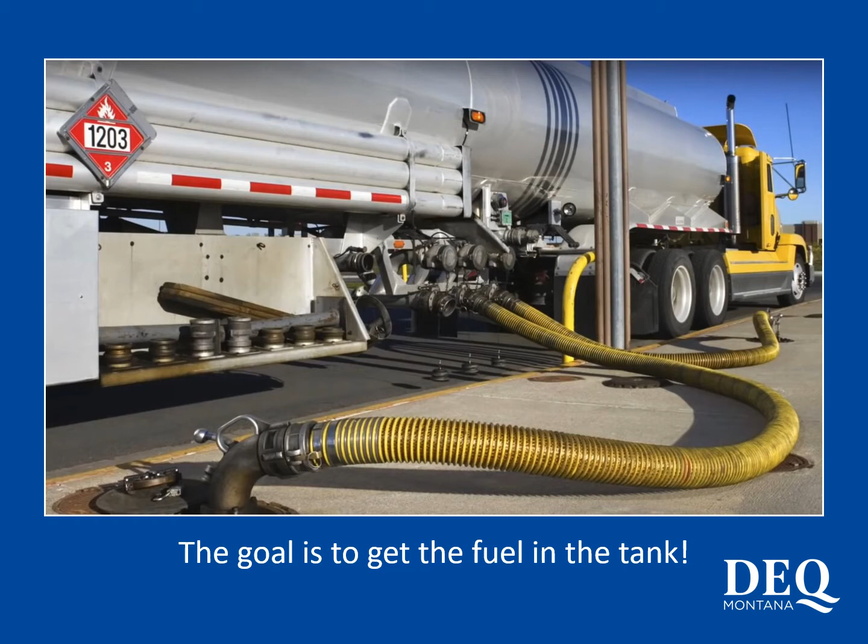Basically, it is our goal that all of the correct fuel be placed in the correct tank, safely.

Always chock your wheels and set the parking brake. Having your truck roll away from you would be quite embarrassing, not to mention it could lead to spilling fuel and even causing a fire.

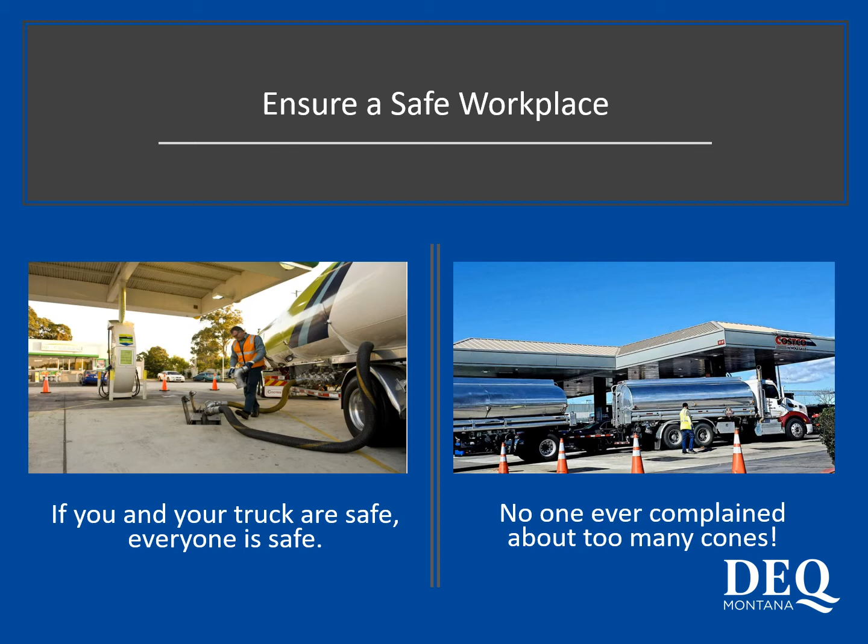Always barricade your fuel delivery area. Cones are your friend. They won't stop a car, but they might give you warning when someone comes too close. Alternatively, if you don't use cones or barricade your work area, anything that happens could be considered your fault.

Check for Montana operating tags. All tanks should have one. If you are delivering to a tank for the first time and it does not have a tag, investigate further. That tank might have been taken out of use since your last delivery.

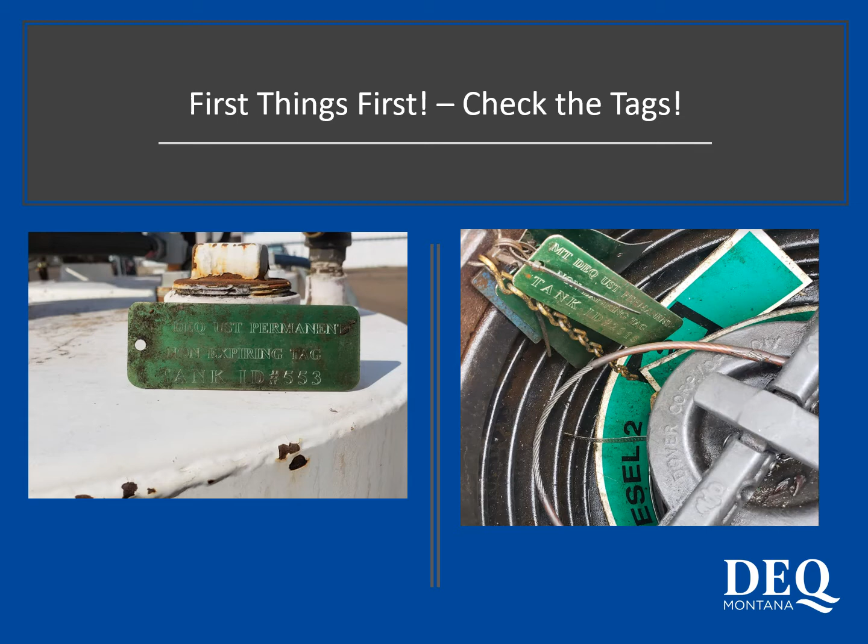Before delivering fuel, check the operating permit for the facility. Make sure the facility has a current operating permit. Look at the operating permit closely and see if there are any tanks with the tank status 'Do not fill.' Be sure you know which tanks you can't fill.

Before delivering fuel, you must check the Do Not Fill list on DEQ's Underground Storage Tank website. The website address is listed on this slide. Any tank on the Do Not Fill list may not have fuel delivered to it.

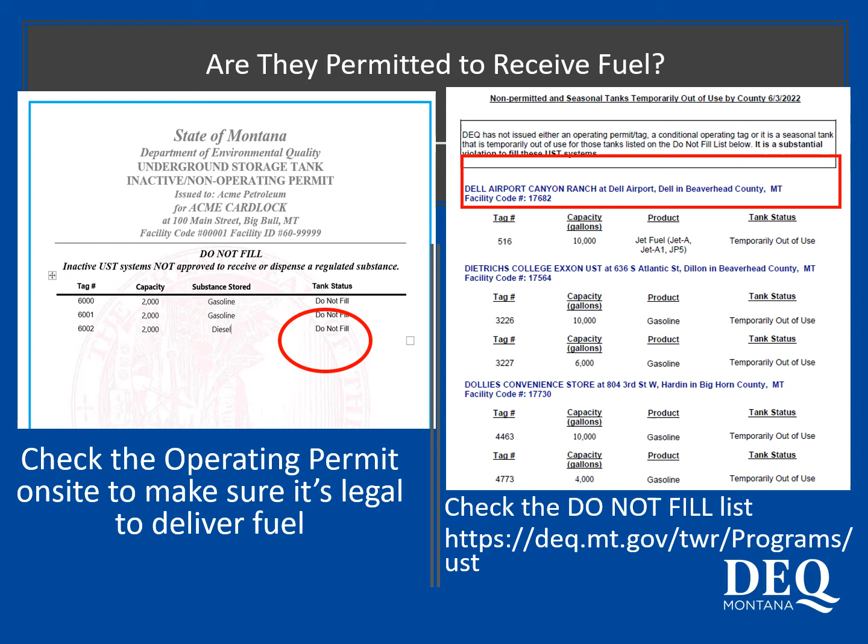If you have any questions, always call someone at the UST program. Delivering fuel to a tank that is not permitted is an expensive mistake and a serious violation. Don't do it.

Always check the product level of the tank before you begin dropping fuel. Since 95% of facilities in Montana have ATGs, print out a current inventory. Sticking the tank and comparing the inches from the stick to the inventory printout can often eliminate a drop into the wrong tank, or the wrong fuel into the right tank.

It also allows you to check to make sure that the tank is empty enough to hold the fuel that you are delivering. Remember, tanks should never be filled all the way full. Use 90% as the maximum level to safely fill a tank.

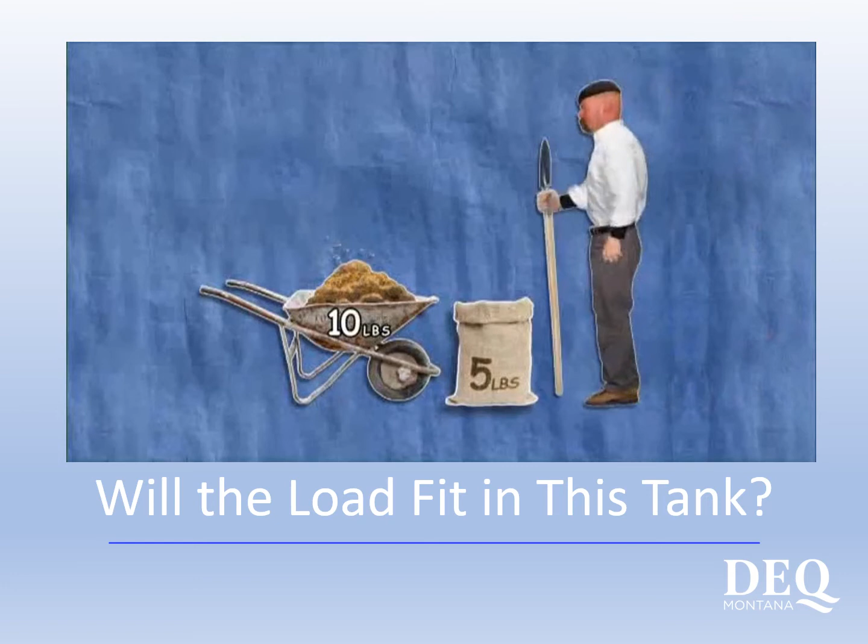We all know about the old cowboy saying about 10 pounds of the horse byproduct. Always make sure you are not dropping too much fuel into the tank. If the amount of fuel dropped plus the amount currently in the tank is over 90% or 95%, you might end up with an overfill situation.

Before you drop your fuel load, make sure you know what overfill protection is at the site. Just because you see a drop tube shut off and an alarm doesn't mean they don't have ball float vent restrictors. If in doubt, look up the facility summary sheet from the UST website or contact the UST program directly.

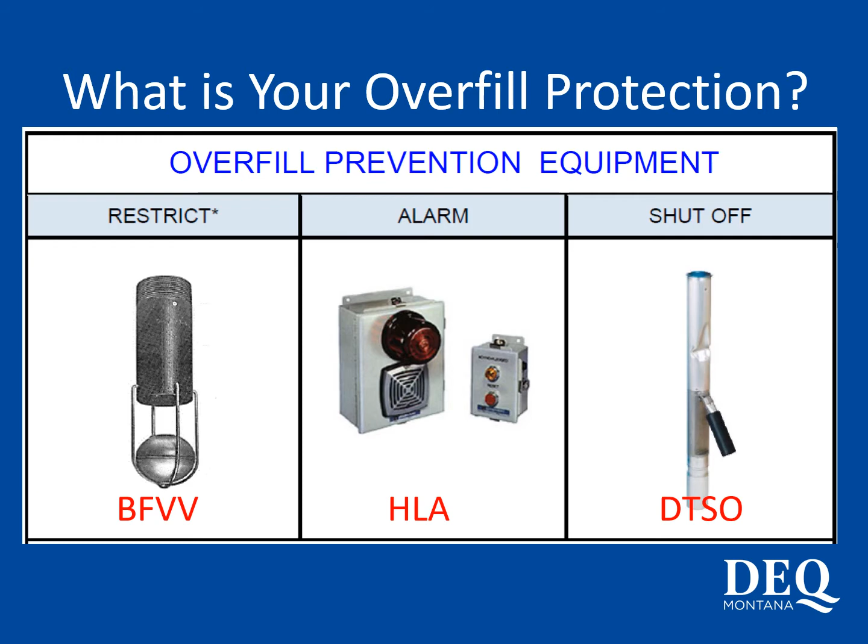High-level alarms are programmed to go off when the product in any tank reaches 90% of its full volume. However, if you are filling 2 or more tanks at a time, the alarm will only go off once. This can hide a second or even third overfill.

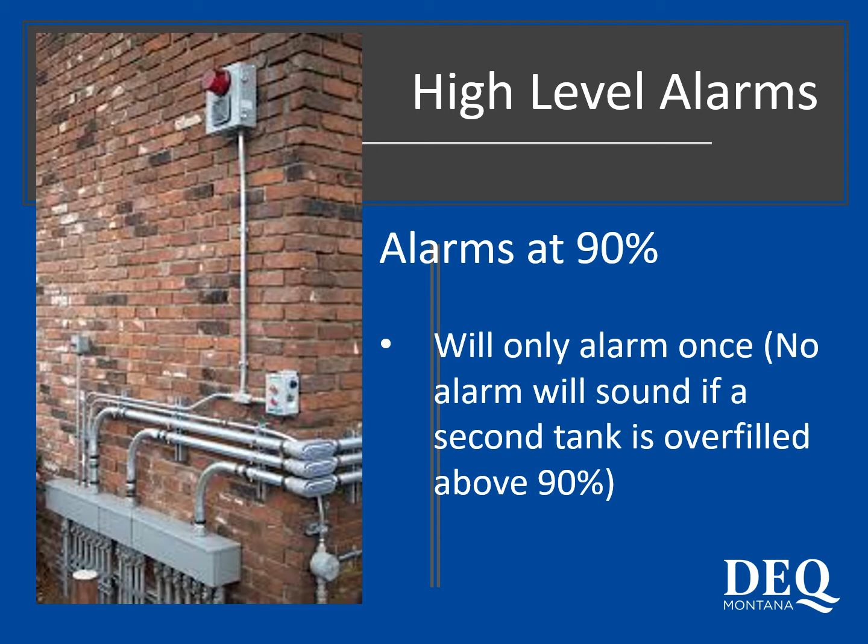Most tanks in Montana use a drop tube shutoff device in the fill riser of an underground tank to make sure that the tank does not get overfilled. These are set to shut off the flow of fuel at 95% of tank capacity.

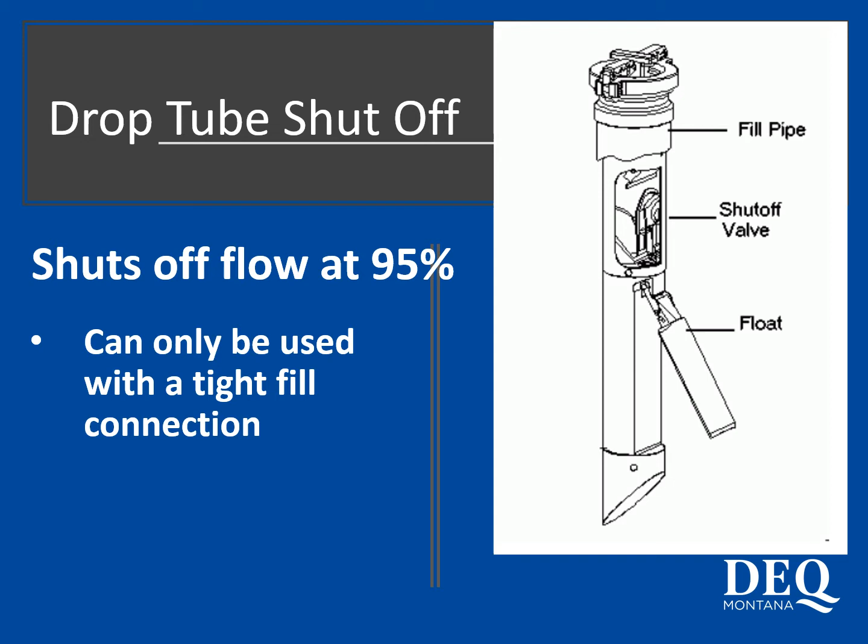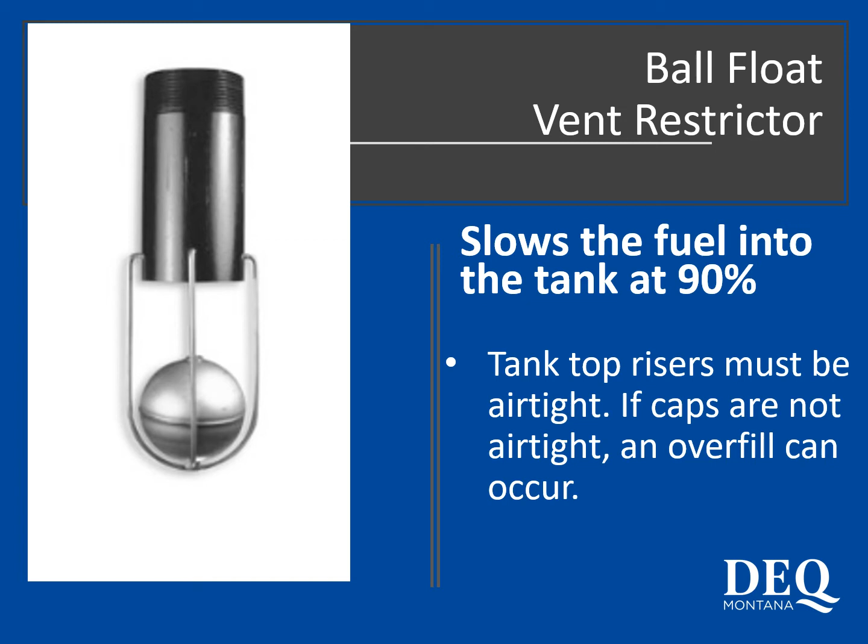The ball float vent restrictor is used to cut off the air going out of the tank through the vent piping. If the air in the tank cannot escape, fuel cannot flow into the tank. However, if the tank top penetrations are not airtight, the vapor and fuel will start coming out of the ATG risers and extra risers once the fuel level rises to 90%.

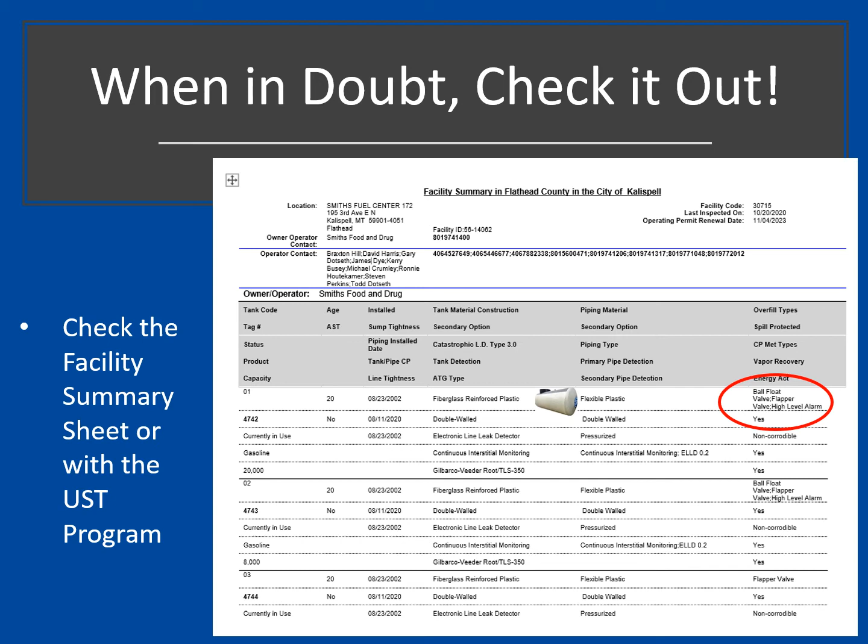Check the facility summary sheets on DEQ UST's website for overfill protection information for all the tanks in Montana. Since sites can have more than one form of overfill protection, it's a good idea to check out the facility summary sheets to see what you are dealing with.

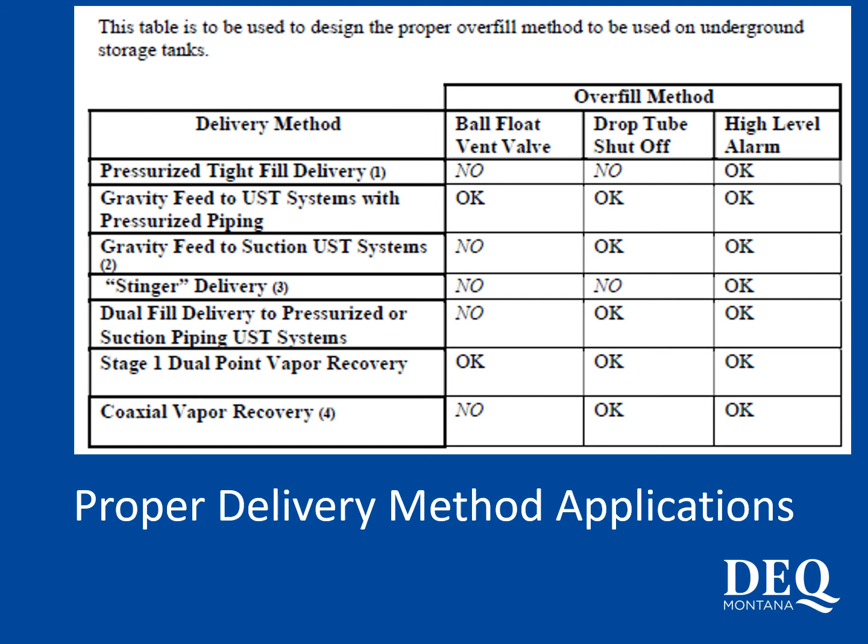Pressurized delivery is never allowed with a tight fill connection in the presence of a ball float vent restrictor or a drop tube shutoff device. When a tank is full and the drop tube valve slams shut, hydraulic line shock can increase the pressure in the delivery hose and cause it to pop off the fill adapter or even burst the hose.

When a tank is full and the ball float restrictor closes the vent piping, the pressure in the tank can quickly pass the 5 psi maximum and blow welds and seams in the tank, causing a catastrophic release. Imagine a full 10,000 gallon tank emptying out of a split seam in just minutes.

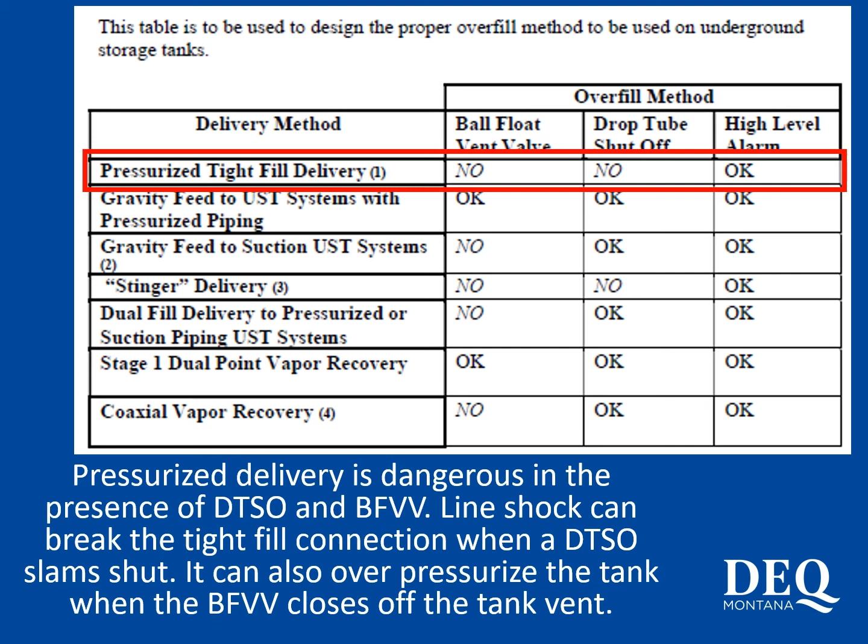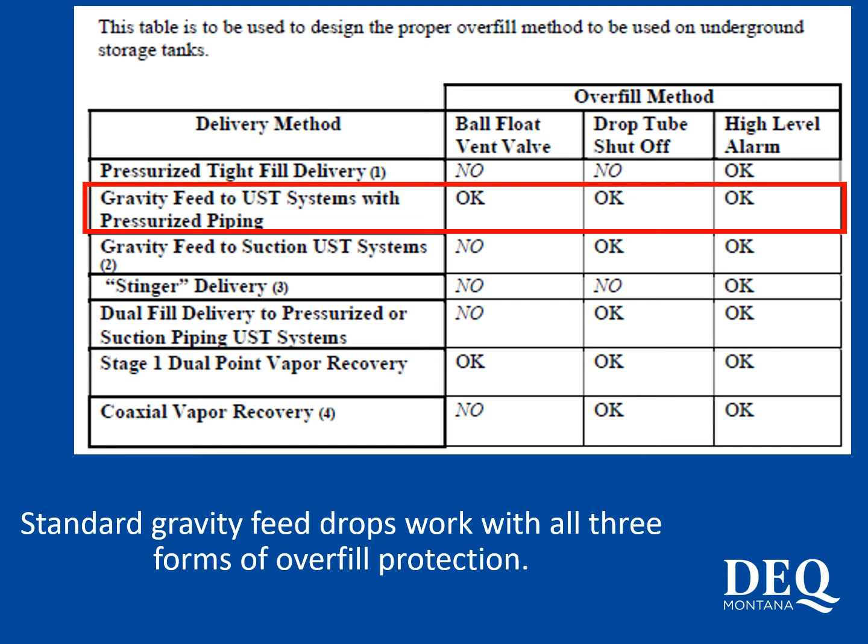Gravity feed delivery consists of a tight fill connection at the fill port, allowing the fuel to enter the tank using gravity to push the fuel from the tanker to the underground tank. All three types of overfill protection are effective with this type of delivery. Always make sure that the fill adapter is tight before connecting the drop elbow.

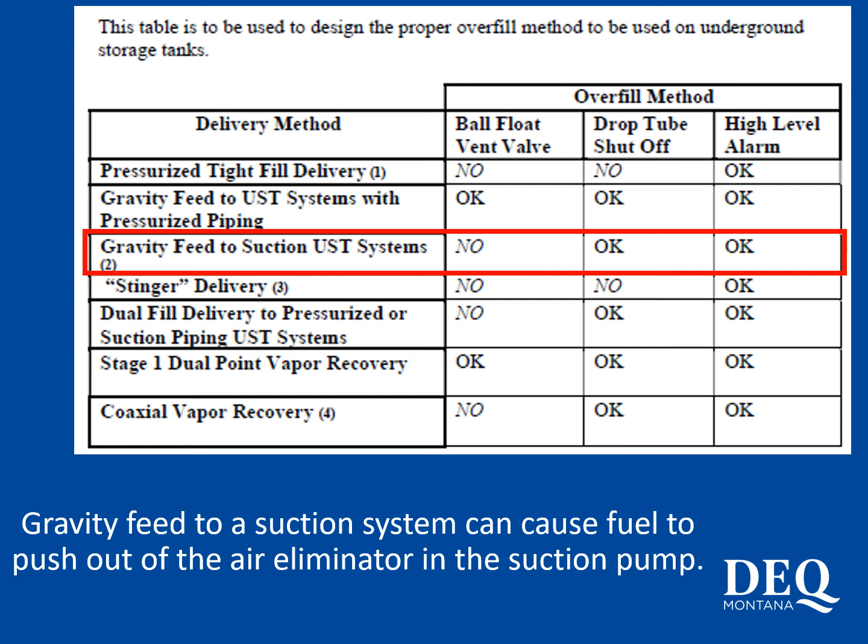Some smaller trucks or wagons sometimes use a pumped delivery using a large gas nozzle to deliver fuel into underground and above ground tanks. This is okay for above ground tanks as they don't typically have drop tube shutoffs or vent restrictors. However, if you use a large nozzle with a 2 through 3 foot nozzle extension on it, it will hold open any drop tube flap or valve and allow the tank to be overfilled. Or, if you have a ball float vent restrictor, you will have fuel spray up out of the fill pipe once the level increases to 90% and closes off the vent.

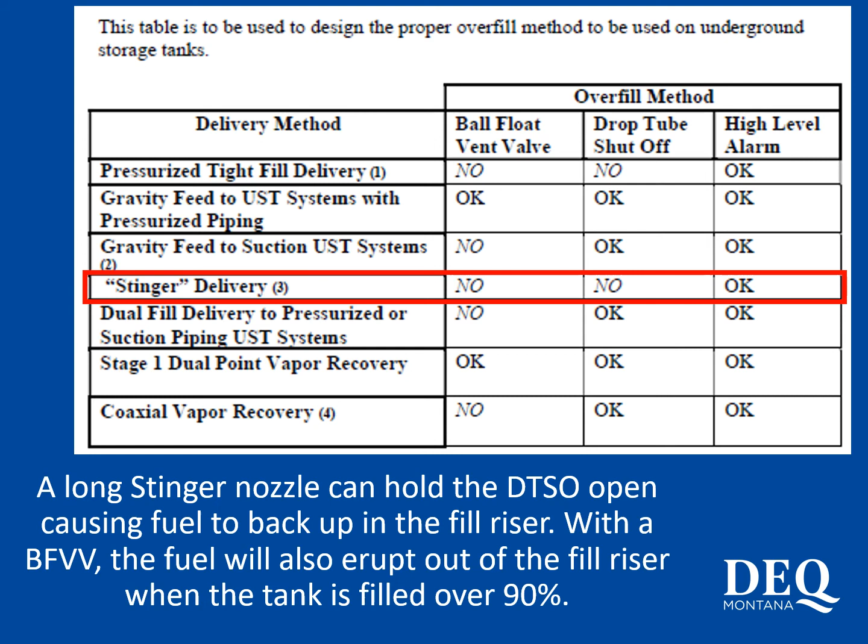During dual hose delivery, you are dropping fuel from different compartments on the transport into the same tank. As the fuel level increases, the ball float vent restrictor will close off the vent, stopping fuel flow into the tank, unless one of the compartments empties before the other. Then the fuel will back up into the hose and truck compartment that was empty, or it will come out of the fill port once the empty hose is disconnected. That is why ball float restrictors are not allowed on tanks with dual fill deliveries.

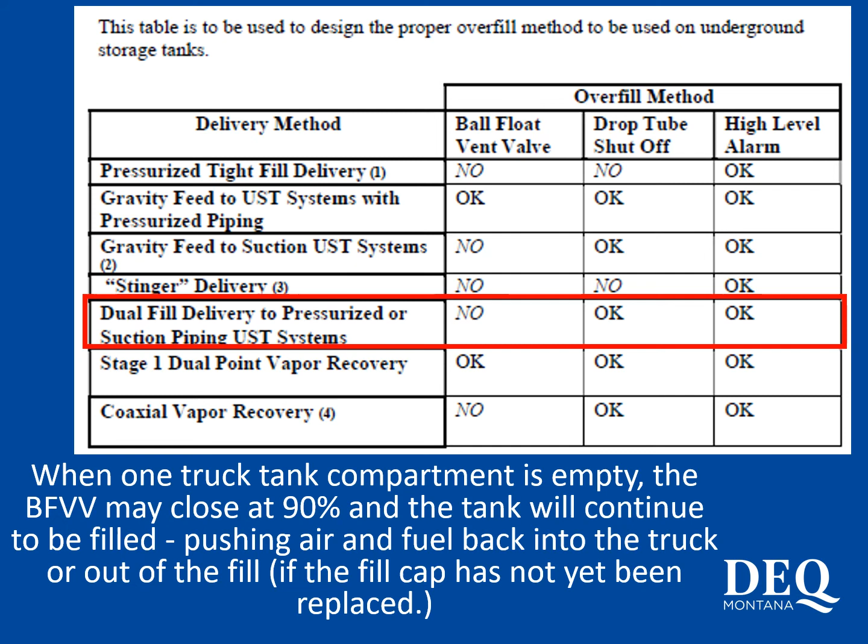When using a coaxial drop elbow, with one hose dropping fuel and the second hose transferring vapor back into the transport, you cannot depend on a ball float vent restrictor to stop the flow of fuel at 90%. When the vent is closed off, fuel is still able to be dropped into the tank because the vapor recovery hose acts as an open vent. If too much fuel is put into the tank, the fuel will take the path of least resistance and go back into the transport compartment.

If the fuel drop is more than 100% of the tank's volume, both the fill and vapor hoses will be filled with fuel. At that point, you will have to wait for the product in the tank to be sold down to under 100% before you can even remove the drop elbow. That could take some time at some stations.

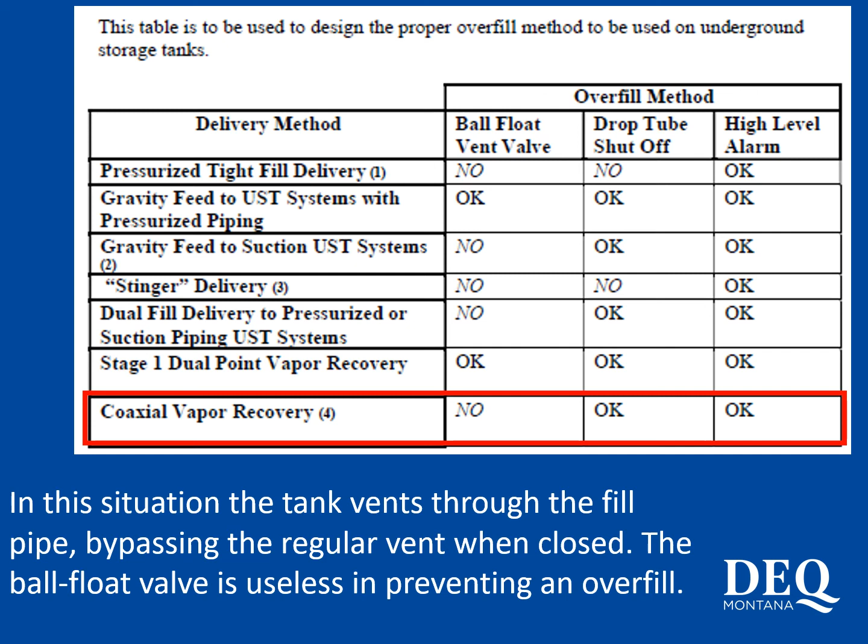It used to be standard practice to put a shortened gauge stick into the fill port to keep the drop tube shutoff valve from closing when it reached its activation point. Now, we know how dangerous that can be.

On a 10,000 gallon tank, with a drop rate of between 300 through 400 gallons per minute of fuel going into the tank, it would only take a little more than a minute to go from 95% full to an overfill situation with no indication that it has taken place. At this point, tank risers are filling up, vent lines are being filled with product, and all of the tank top bungs will be in fuel.

If you find sticks in the fills when you arrive at the site, notify your dispatcher and the station owner of what you found. Then remove the sticks and dispose of them appropriately.

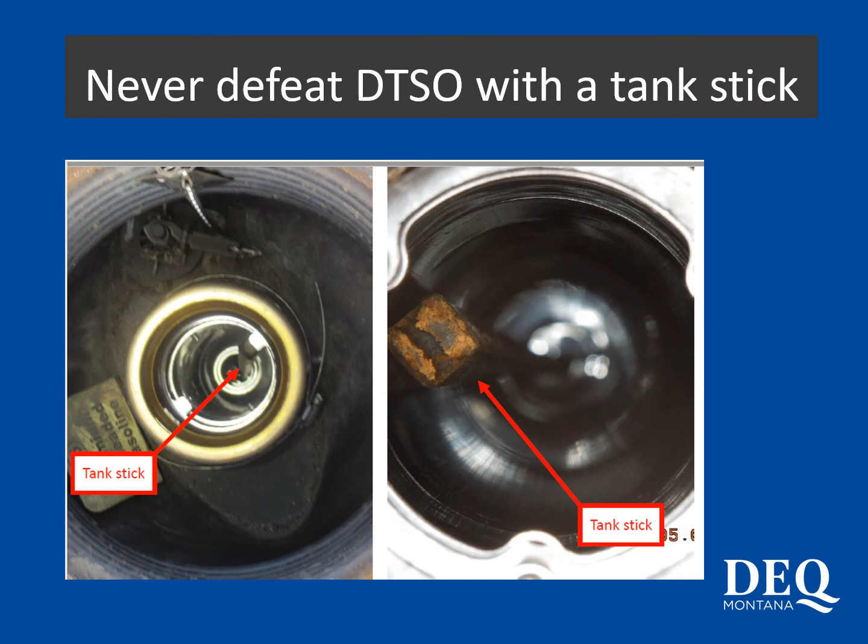If dual point vapor recovery is installed on a tank, you must use a vapor recovery elbow and a hose during filling. These are installed on stations that meet certain throughput criteria for selling gasoline.

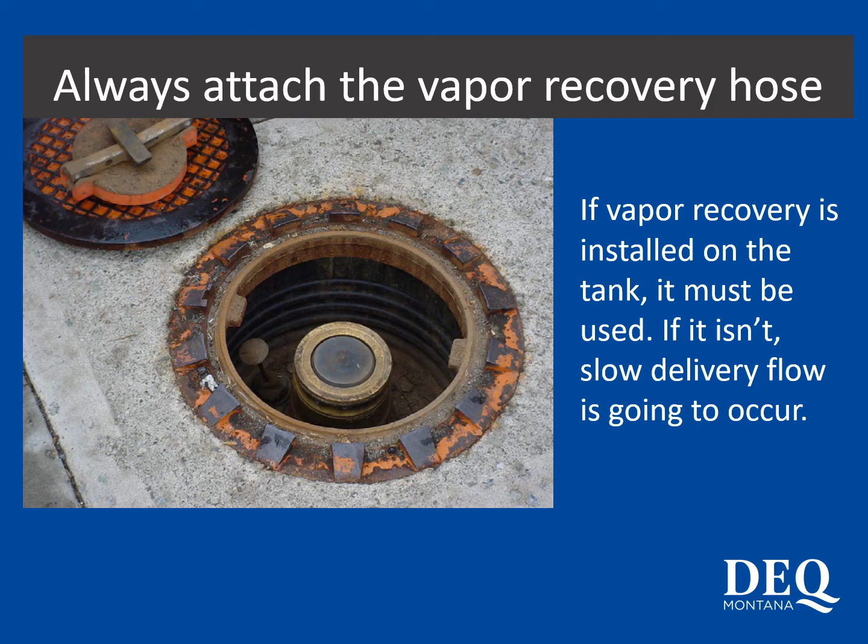If the air in an underground tank that is being filled has nowhere to go, the fuel cannot enter the tank. If the pressure vent caps are the only way that vapor can escape the tank, it will slow down the filling rate of the tank dramatically. One huge reason to use vapor recovery properly.

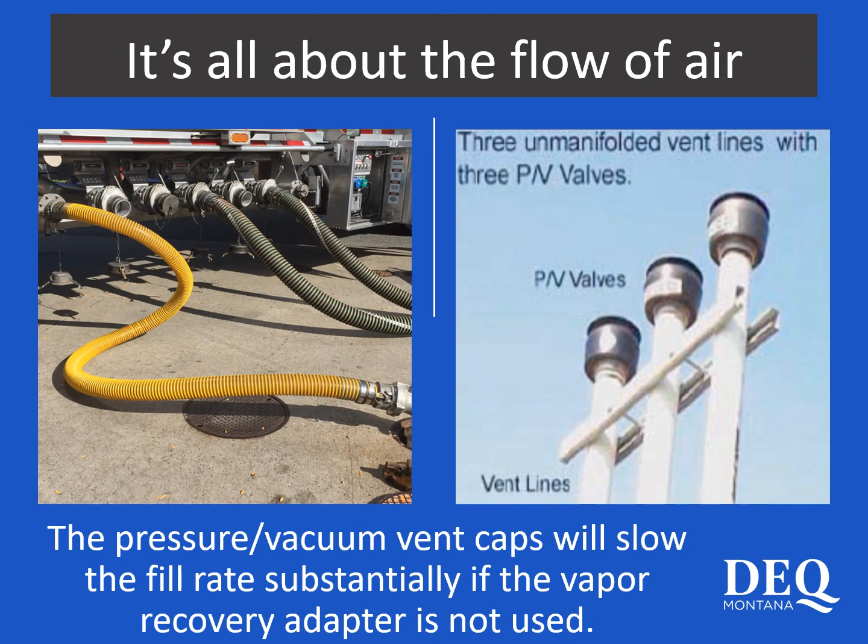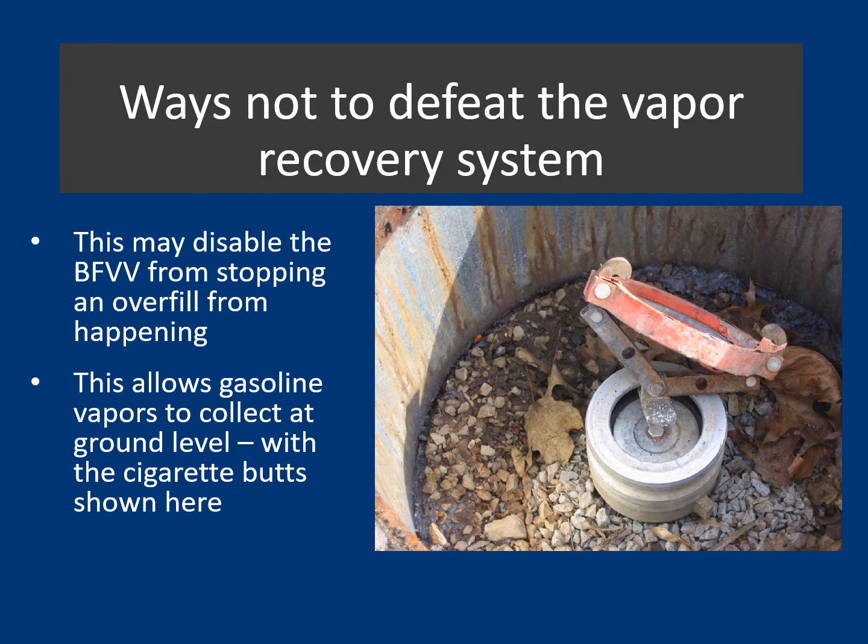If a vapor drop elbow is not installed on the stage 1 outlet, the vapor, which is heavier than normal air, can pool and be ignited by many means. This is especially dangerous on hot days with no wind. Don't be fooled. Just because you can't see vapors doesn't mean there is no danger. Remember, fuel vapor is invisible and highly ignitable.